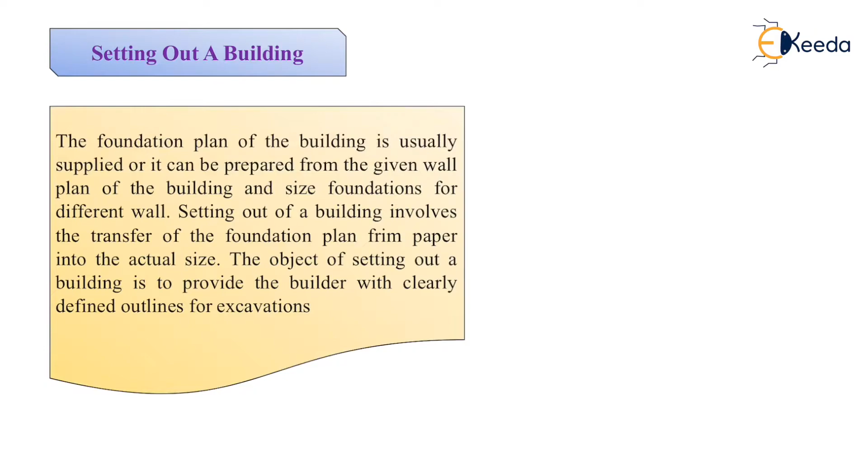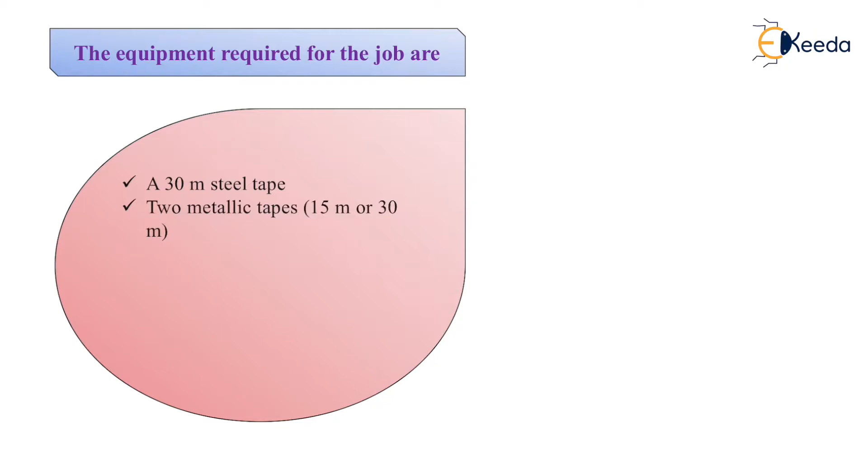The different equipment required for this job are a 30-meter tape, two metal tapes of 15-meter and 30-meter, a long cord, a plumb bob, some pegs, nails, and a hammer.

It is used to set the pegs or stakes at the exact position of each corner of the building, as they will be dug out while excavating the foundation.

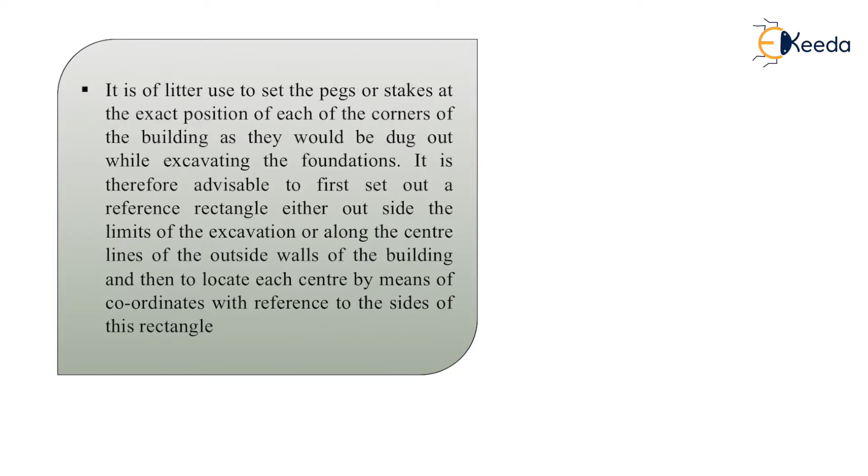It is therefore advised to first set out a reference rectangle either outside the limits of the excavation or along the center line of the outside wall of the building, and then to locate each corner by means of coordinates with reference to the sides of this rectangle. We can use two different methods that will be discussed in further slides.

Both methods of forming the reference rectangle and setting out the building are described below. The first method is setting out the building by circumscribing rectangle, and the second is setting out the building by center line rectangle.

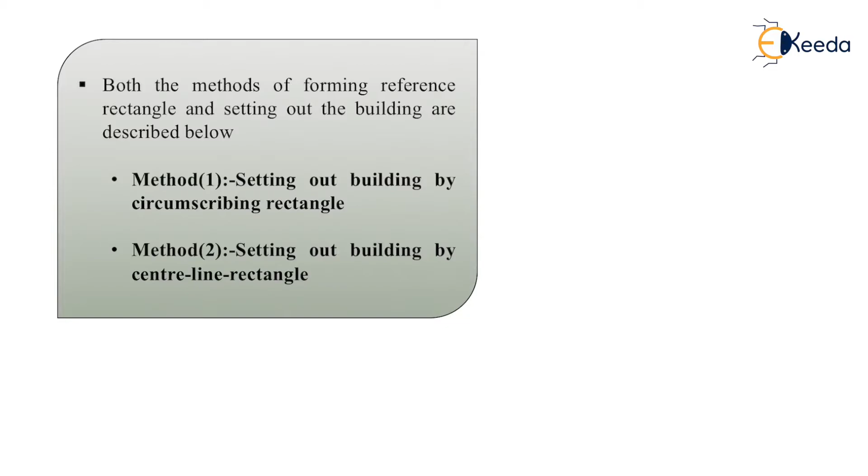We'll discuss both methods in detail. The first method is by using a circumscribing rectangle.

Since pegs or stakes cannot be set at the exact corner point of the building, these are set at the corners of a bigger rectangle around the building. So we'll be setting up a rectangle, and this will form the outer boundary of your building.

Any suitable distance of the outer rectangle from the building can be chosen, but a distance of usually 2 to 5 meters is considered ideal.

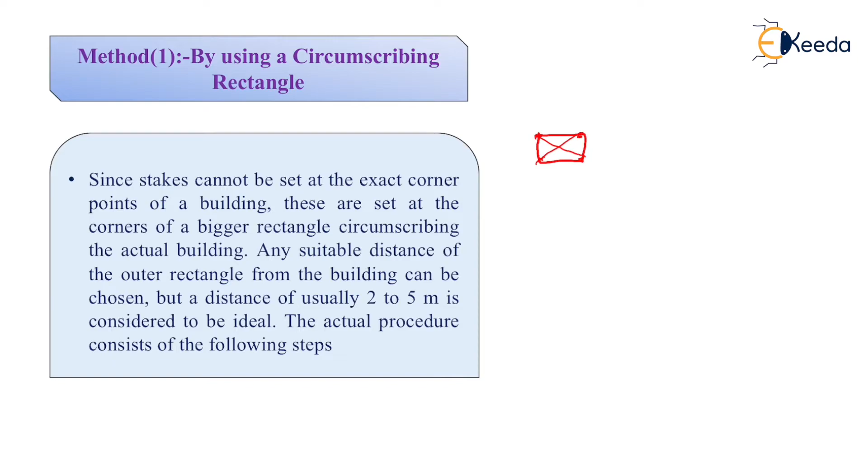The actual procedure consists of the following steps. Let us start with the procedure. First, I will show you the figure also, so that it will be very easy for you to understand the actual procedure, which I will be discussing with you.

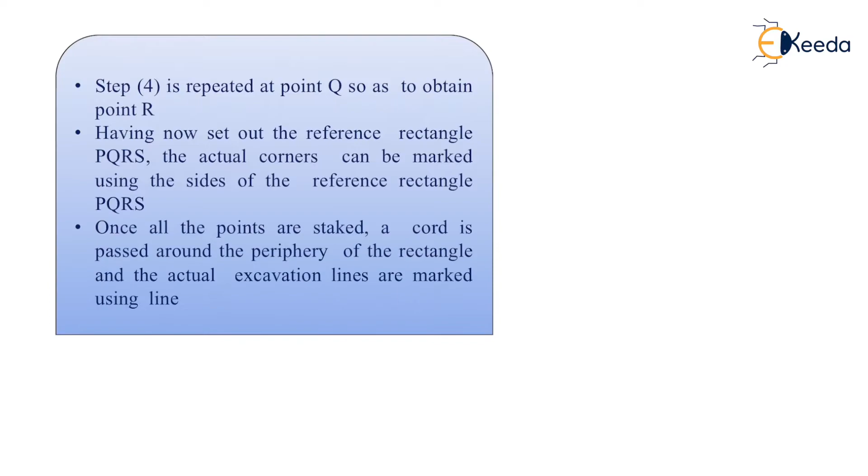For this procedure we require an image, and lastly we have to provide a check also. So this is the actual image. Now I will discuss how we set up a building using this rectangle method.

Preparation of the foundation trench plan shows the width of the foundation for various walls, as you can see in this figure. Temporary pegs are driven at the actual corner points of the foundation plan.

Then using these pegs as reference, a parallel line, say PQ or AB, of required length is set out at a selected distance from the actual center line.

A cord is stretched between the pegs, and at point A a line is set out perpendicular to line AB. On this line, point D is marked by setting a peg.

Then repeat the same procedure at point B also, so as to obtain point C.

Having now set out a reference rectangle ABCD, the actual corners can be marked using the sides of this reference rectangle ABCD.

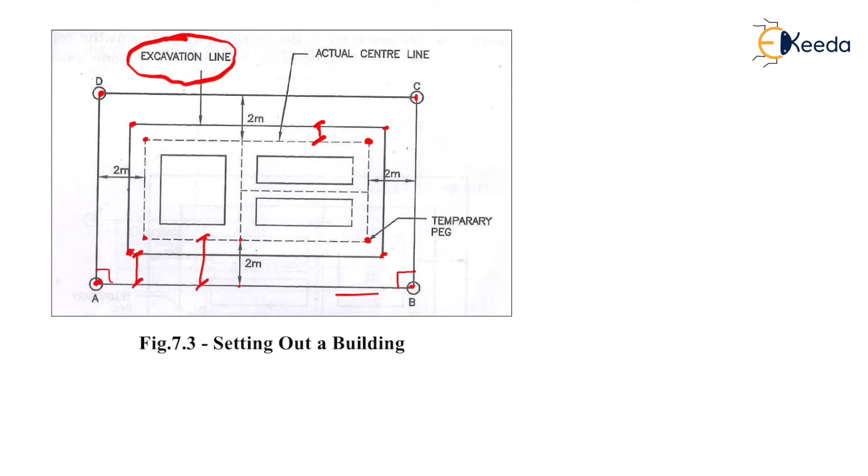From the center line we have to mark excavation lines from outside as well as inside. This is set up by using the reference rectangle, and after marking points C and D, we have to check the diagonals AC and BD. This length should correspond to the distance on the plan.

So after setting out the points, we have to check the diagonal distance between AC and BD. Same thing, we check this diagonal distance between the center lines also, and this should match what is given on the plan. That is the checking we do by using the diagonal distances.

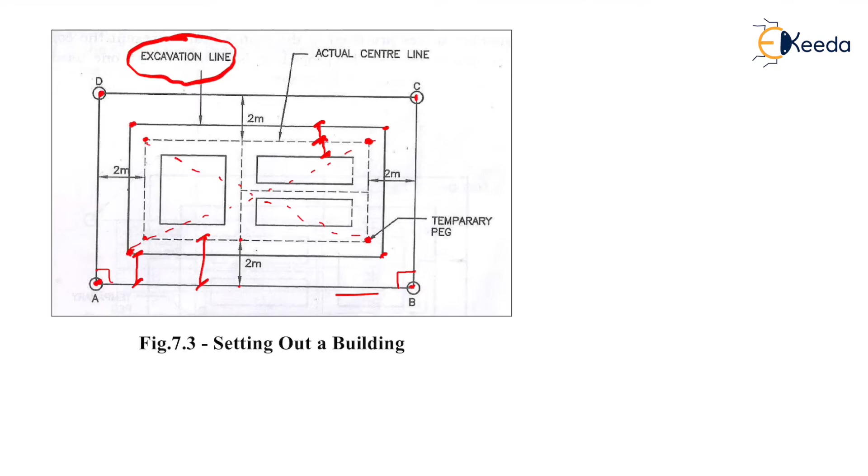Now let us discuss the second method, using the center line rectangle. By using this method, the center lines of the outer walls of the building are formed. The procedure is that the reference rectangle formed by the center line of the outside wall of the building, as shown in the figure, is known as the center line rectangle.

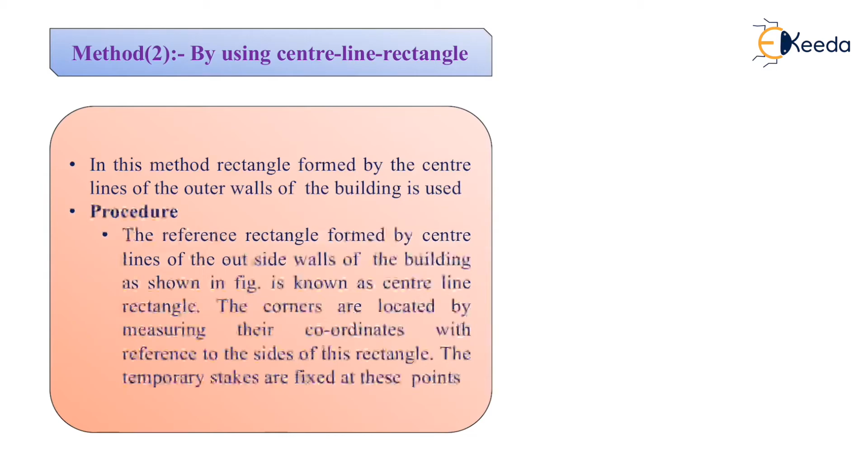The corners are located by measuring the coordinates with reference to the sides of the rectangle. The temporary stakes are fixed at these points. Now how do we do this? We'll see.

Since these center line pegs are not permanent and will be lost during excavation, because we actually require excavation, the sides of the center line rectangle are produced on both sides, and permanent stakes are fixed on each side of the prolongation. I will show you in the figure what we are doing, because the center line pegs will be lost.

So we have to mark its position using 2 different points. How will we be marking? We have to use two different points and their distances from a single point, so that in the future we can again mark these 2 points even after construction.

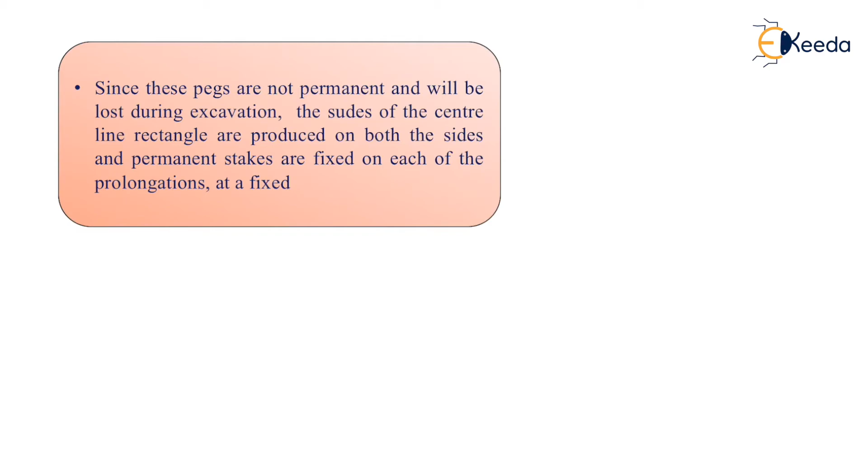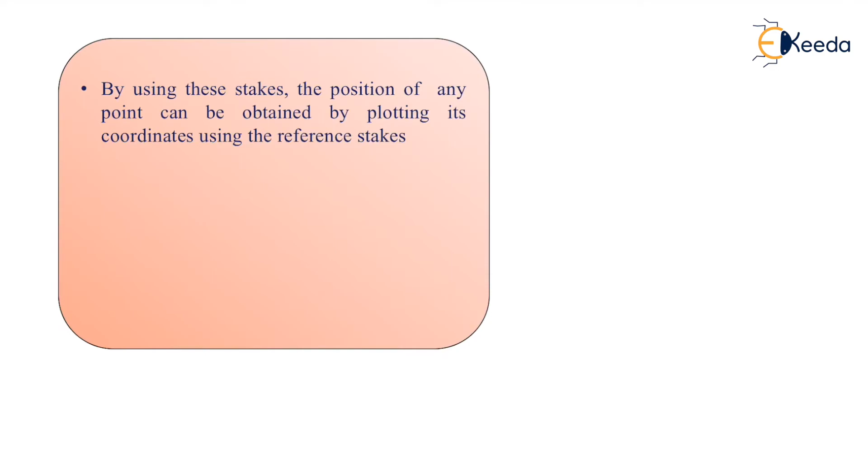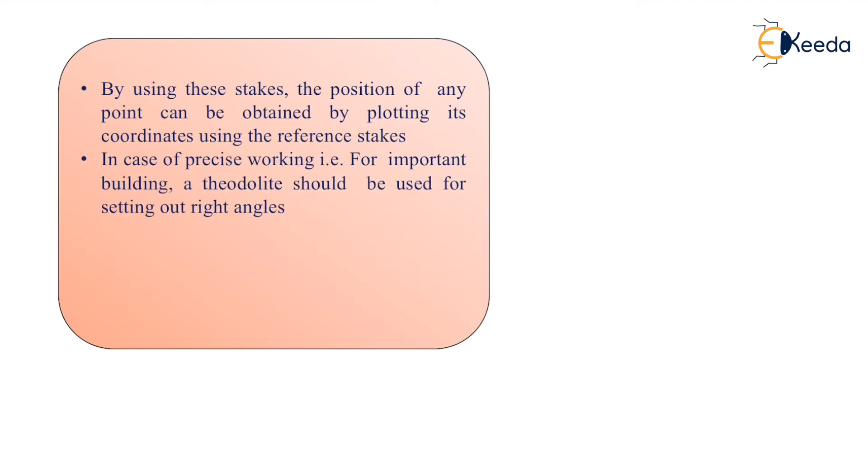After this, using these pegs, the position of any point can be obtained by plotting its coordinates using the reference stakes. In case of precise working, for an important building, a theodolite should be used for setting out right angles. A benchmark should be established in a convenient position away from the site of work, so that it remains undisturbed until the work is completed.

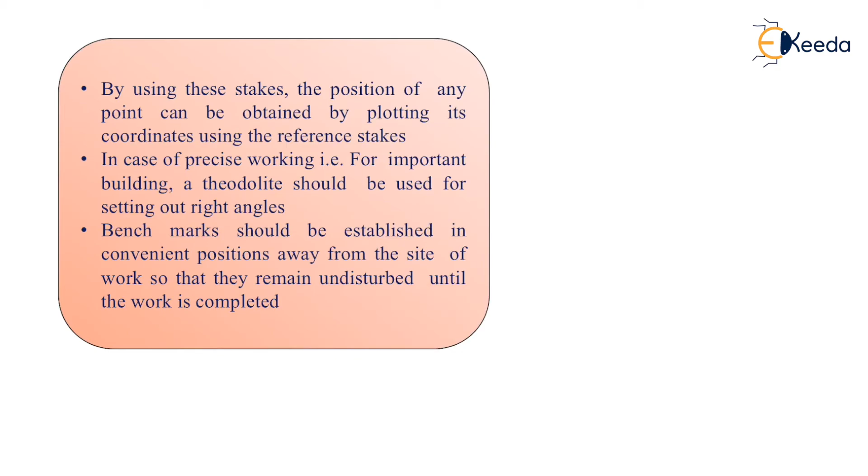Now in the figure you can see how we have actually set up this building using the center line method. In this method, I will explain to you now in detail.

Look over here. First of all, we have marked this center line, points A, B, C, and D, with reference to some common points which are already given. As you can see, after marking this center line...

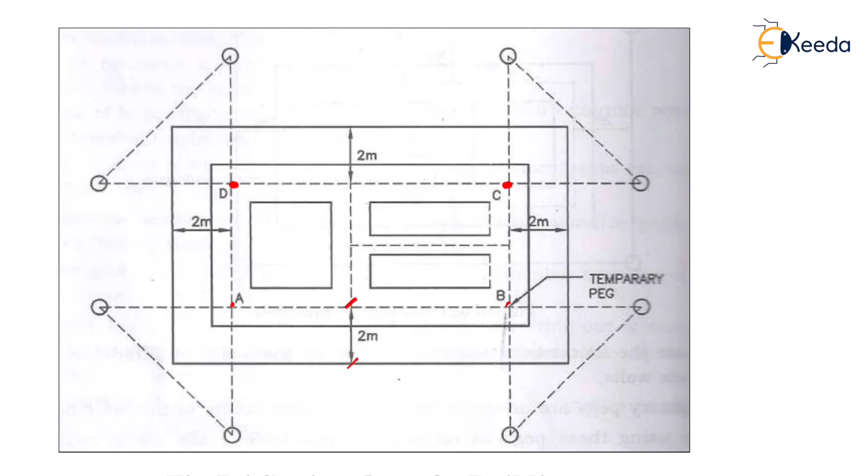By knowing the coordinates of different points from the center line, we have marked the other points. For example, we have marked the corners of the external walls, and the internal corners also, by knowing their coordinates, or x and y distances, from this center line.

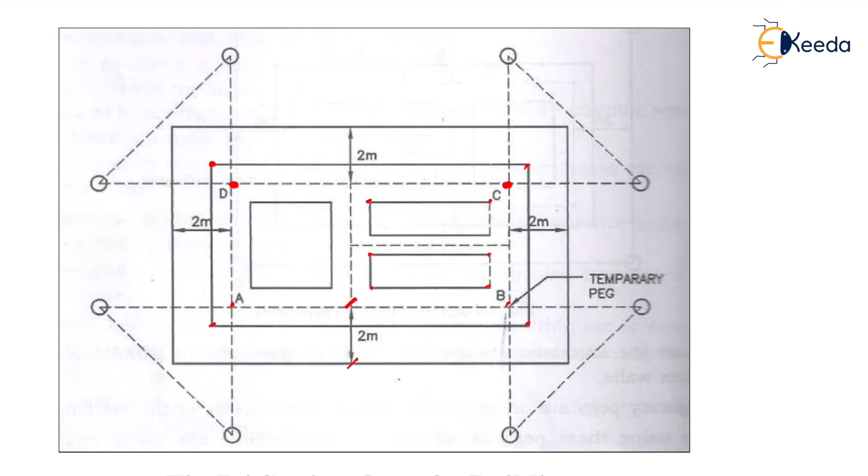Now while excavating, we'll excavate this part. Because of excavation, the already marked pegs A, B, C, D will get lost in the excavation. So to maintain its position, what we have done is take out two rectangles.

From these two right angles we have marked 2 points, say B1 and B2, and for A it will be A1 and A2. So in the future, using these 2 points, we can re-establish point A at any time, and by using the coordinates of different points, we can then set up different points using this center line.

In this video we have discussed how to set up the center line of your building, as well as how to use a reference rectangle method to set out a building. Thank you.